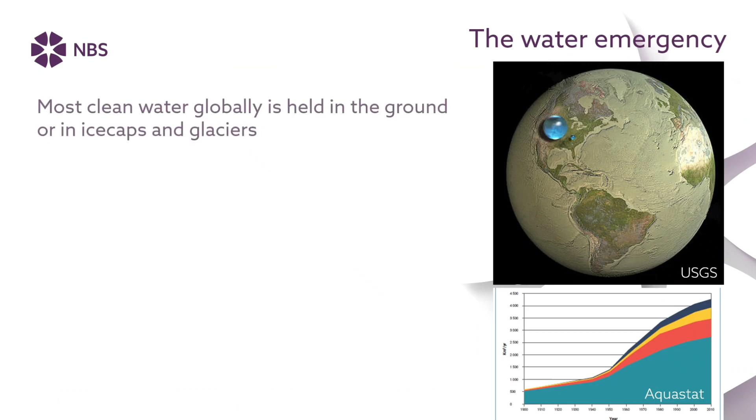You may have seen the world's water diagram by the US Geological Survey, showing the very small amounts of clean water that are shared across the globe. But water obviously doesn't stay in one place, it's constantly moving, and much is in the atmosphere.

But further to those UN statistics, we are in the midst of a water emergency globally. There are multiple risks associated with water insecurity, including economic and financial threats, in terms of successful agriculture, personal health, but also things like tourism and property.

That lack of clean water, not just in terms of the recent pandemic, but in terms of other diseases that have been eradicated in some parts of the world, still impacts low-income nations, often because of a lack of clean water. And remember, supplying clean water and removing waste across nations is a really carbon-intensive and expensive practice.

So many of those aspects are global issues that are likely to be discussed at COP26, but water management is a very national and regional activity. Which is why I'm pleased today to be joined by Claire Galland from Everflow Water, who's going to provide that perspective for us. Thanks, Claire.

Hello, I'm Claire Galland. I'm the Water Efficiency and Environmental Services Manager at Everflow Water. We're the largest independent water retailer in the UK and the fastest growing company in Europe this year, reaching 100 employees in 5 years. We serve 65,000 non-household customers in England and Scotland, and we're growing by more than 1,400 a month. So today I'm going to talk you through a few things.

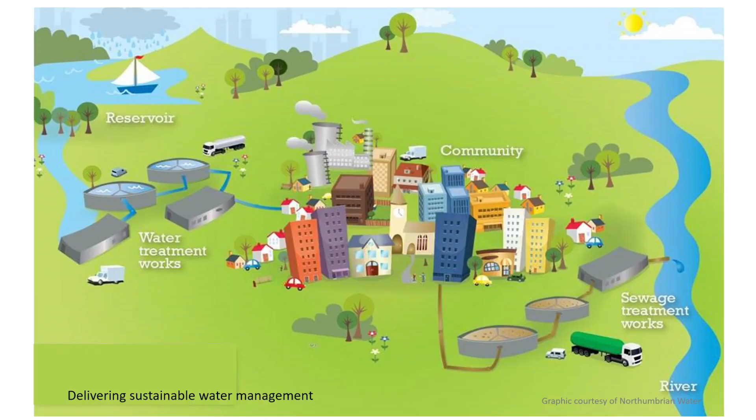The first slide is a graphic kindly supplied to me by Northumbrian Water. There's a limited amount of fresh usable water on Earth. Fortunately, water is naturally recycled through the water cycle. Wholesale water companies tap into this natural water cycle and clean fresh water so it's safe enough to drink. But after the water's been used, they clean it again before returning it to the environment to rejoin the natural water cycle.

Some of the issues affecting this water cycle and the urban water cycle, I'm going to detail now. These are the needs, why we need to take action. The nation's water usage is increasing, rain is less frequent and more intense, and existing infrastructure isn't fit for purpose. Sewer networks usually combine surface and foul water, if not at property level, then somewhere further down the pipe. And while modern developments may separate foul and surface water, water companies don't always adequately upgrade their infrastructure accordingly.

As a nation, we need to allow for economic growth, new housing developments to alleviate the housing crisis, immigration to fill the skills gap in the labour force—very current at the moment—and intensive farming to feed workers and their families. That means there's less and less room and resources for nature that we're taking from. This is having a serious impact on insects, animals and plant life, as well as putting the reliability of our water supplies at risk, particularly in certain parts of the country, but it is a national problem.

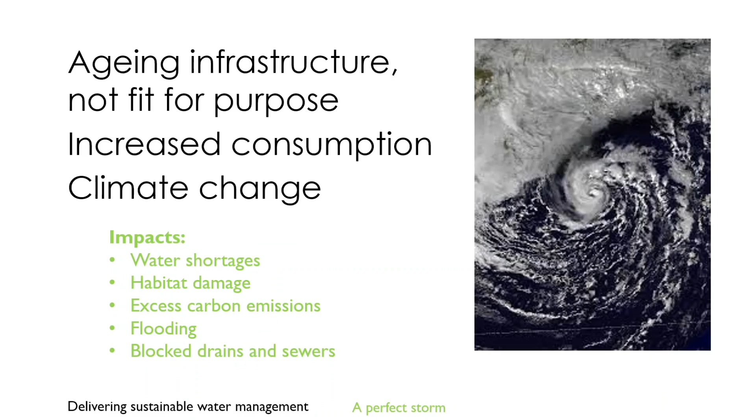So I've given you all the problems, but there are solutions available. We just need to accelerate the uptake. Without action, we'll face a water supply deficit of over 3,400 million litres of water a day in England by 2050, due to population growth, climate change, and the need to protect and restore the environment. That's within a lot of our lifetimes. Failure to act now poses severe risks to our economy, society and the environment.

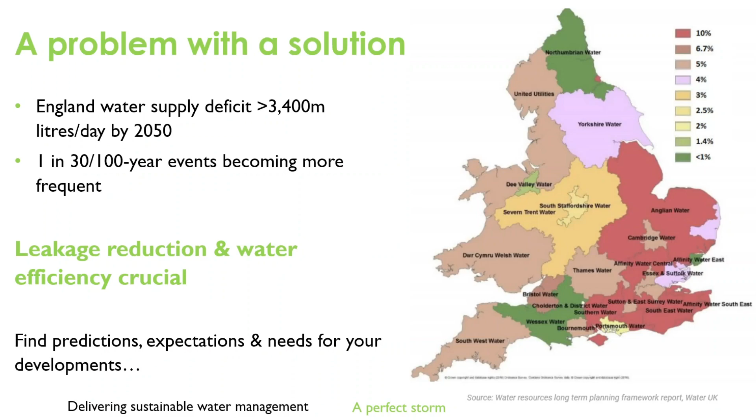Reducing water demand through leakage reduction and water efficiency is crucial, and that's what my role is at Everflow Water. I'm going to point you towards some sources of information where you can find out more about the particular areas you might be building in or specifying for.

All wholesale water companies are required to publish water resource management plans every 5 years. They do this at both a company level and a regional level, collaborating in particular regions of the country. They also produce drought plans, which detail the measures they'll take when things are particularly tight in terms of water supply. So you can check these to understand their climate and water supply predictions, their expectations, and what they need from the developments you're contributing towards.

Wholesalers can use pressure management, for example, to reduce leaks and water consumption during peak periods and droughts. Some may use emergency resources like desalination plants if necessary. But ultimately, your end users who use the buildings you're specifying and designing for can experience temporary use bans or rota cuts. Peak demand during the extreme hot weather in 2018 increased by 10% less for metered customers, so when customers are able to see their usage, it helps with demand management.

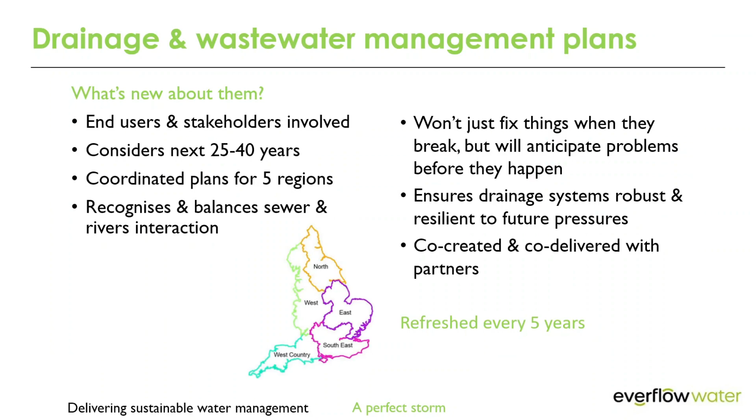Just a few facts and figures to bring some points home. People treat water like an infinite resource, yet only 5% of the water on the planet is safe to drink. It takes energy—6% of energy used in the UK is on water. This energy is used to treat it, transport it, heat it in our homes, as well as build and maintain water and wastewater networks.

Reducing water consumption is an important part of meeting COP26 net zero goals, and a large proportion of the carbon in water use is on water heating. Things you can do include designing and specifying solar water heating panels and storage on buildings, which could make significant savings on energy bills.

On top of this, the amount of water we all use per head has actually doubled to 142 litres per person per day since the 1960s. We need to halve it again before it becomes an emergency. Early indications from the Environment Bill suggest a national government target of around 15% reduction by 2040.

You may have heard the adage, what gets measured gets done. An important principle in behavioural economics is feedback—if people can see the difference their actions are making, they're much more likely to stick to a change in behaviour. Diet programmes make great use of this.

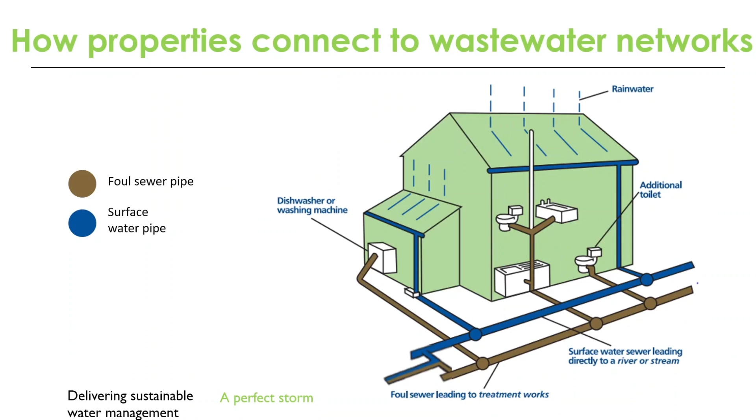A little more about combined sewers, which the majority of housing stock in the UK have—they take both surface water and sewage into the same pipe. In normal weather, this mixture is all treated at sewage treatment works. But in heavy rain, combined sewers can be overwhelmed and flood homes and businesses. Storm overflows release excess water into rivers and the sea, passing it through screens to avoid passing litter into the natural environment.

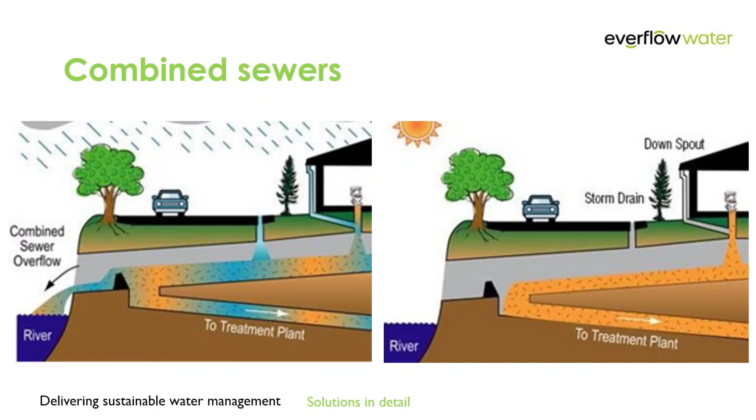Flooding is really destructive. We've had a few events in the UK recently where we've seen what it can do. Luckily, we haven't had anything like Germany, where they've actually had loss of life. It's destructive to both the property and the structure of buildings, and it's happening more frequently.

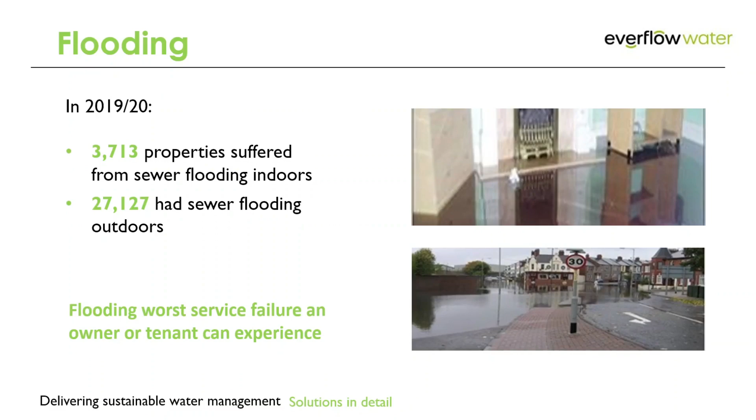Putting the wrong things down drains causes blockages, slow smelly drains and flooding. Fats and oils from kitchens solidify to form huge lumps that block sewer pipes, called fatbergs.

There have been some high-profile prosecutions recently around pollution. Wholesale water companies don't always do the right thing, but blocked sewers, heavy rain and tree roots, or misconnected sewer pipes also play their part in the pollution of our waterways. Not all doom and gloom, though - there are solutions within our grasp.

So I'm just going to talk you through some ways you can future-proof designs and specifications for built environments. I'd like you to think about, while we're going through, how you could help reduce or cope with droughts and flooding and provide value for your clients, which would ultimately aid you with acquisition and retention. Our main driver at Everflow is we want to do the right thing, but we also see it as a commercial advantage for ourselves as well.

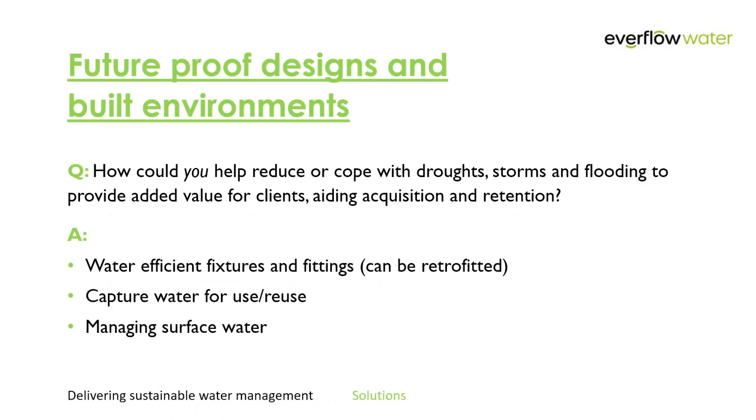So what were once thought to be 1-in-30-year events are actually becoming more frequent. Your customers could see future-proof designs as added value or corporate social responsibility, meeting their priorities for that, and it could make the difference between winning a contract or not. You could even work with developer services providers to make the site completely water neutral. Ofwat's Innovation Fund has just announced that it's supporting Affinity Water to trial water neutral developments in the east of England with Equality. So I'll now go through some of the things designers and specifiers can do in detail.

So leakage is a major source of inefficient use of water, and it's treated water that is basically not being used for what it was being treated for. You could think about where water mains and sewers could go so that they're accessible for maintenance and repairs. You can also minimise their length and joins, corners and other stress points where leaks could occur.

Finding and fixing leaks is a major cost, and reinstatement is always an issue, which prevents many leaks from actually getting fixed. So you could consider designing buildings with leak detector chambers, either on each floor or for each office indoors. You could also design in multiple flow monitors or smart automated read submeters outside to help locate external leaks quickly. This is especially useful on larger sites where undetected leaks can cost tens of thousands of pounds over relatively short periods of time. AMR meters can alert building managers to a burst via mobile networks almost immediately, and also provide accurate meter readings to allow clients to track their usage over time.

In my experience, many leak detectors are cheap to buy, but they do lock the customer into a contract in order to view their data. So you could try to find ones that facilities managers and ordinary users can easily read themselves rather than having to log on to some sort of portal.

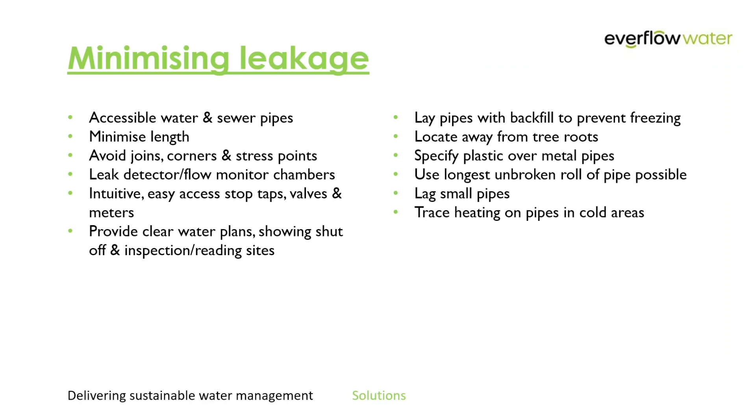As I mentioned before, what gets measured gets done. Customers on water meters use less than those not on meters. This is because they think more about their water use, as they can save money by saving water.

Traditional meter readings are taken manually, mostly a few times a year, but smart meters provide readings hourly or more, so they're much more able to respond and actually do something about leaks and unusual usage levels.

Problem is that wholesalers' costs are mainly committed to maintaining and upgrading existing infrastructure networks, and a large part of customer bills is actually fixed, not related to how much they use. Most meters are over 20 years old as well. Replacing them can cost a lot compared to all the other commitments wholesalers have, so they often aren't prioritised.

On top of that, smart meter rollout is patchy and slow, and only a small proportion of water meters are currently smart. Some wholesalers like Anglian and Thames in London and East of England have really ambitious smart metering programs funded by customers. It's no coincidence that their water resources are based in the eastern area of the UK that's classed as the most water stressed, the desert of England.

So water retailers are lobbying Ofwat at the minute for meter ownership and the responsibility for maintaining, replacing and reading meters to be removed from wholesalers. MOSL, the market operator for non-households, is undertaking a review of meter responsibilities as we speak, and the industry really needs competitive contracts for meter management to provide consistency between different wholesaler regions of England and put metering higher up the list of priorities.

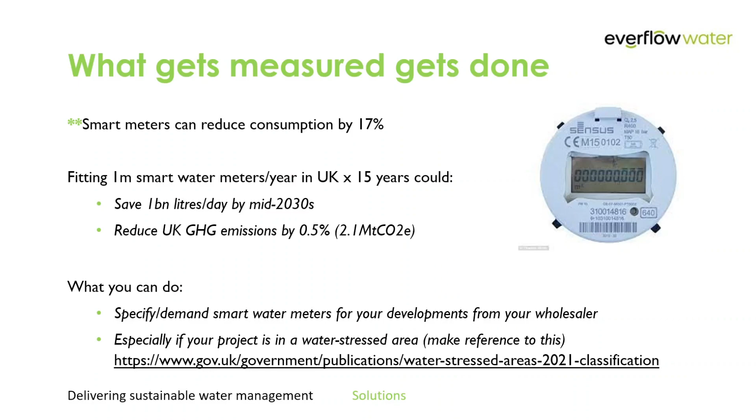You can play your part too by specifying that you want smarter water meters for your sites to your water wholesaler.

Here are some of the water saving fixtures and fittings that you can specify or design into your plans: push or sensor operated taps, tap and shower aerators, flow limiting or pressure reducing valves. They can all be retrofitted on existing building stock, but new developments should really have these as standard by now.

Water efficient taps with aerators can consume 75% less water, and dual flush and other innovative toilets can use 75% less water than the old 10-litre single flush systems. If customers use less hot water, they're also saving on their energy bills and carbon emissions.

When specifying toilets, for example, try to choose dual flush mechanisms, but not just the standard ones—ones that make it obvious which button is for big and small flushes and aren't easy to flush the wrong one or both by mistake. In my role so far, I've not found a very wide choice of suppliers of eco or water efficient products in the market, so there could be some opportunities to market new water efficient products for some of you.

We're actually a tech company and believe in keeping things simple, so we're innovating in how customers can identify opportunities for them to save water without needing to send out costly consultants to site. This could potentially be applied to building designs before they're even built. So if you're interested in discussing this, do get in touch with makemegreener@everflowwater.com.

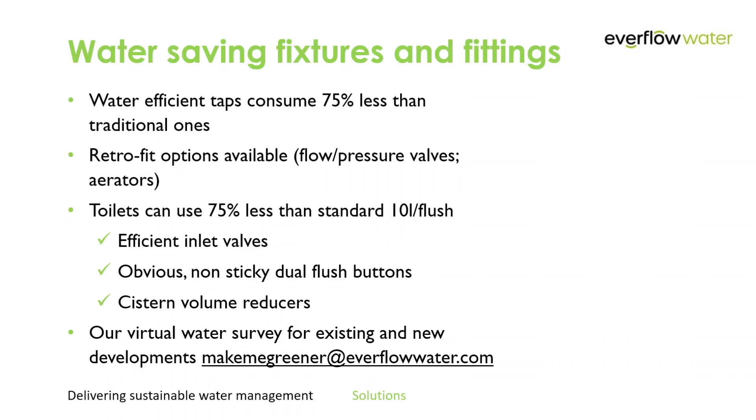A little bit about national standards and some funding opportunities now. There are going to be opportunities to develop and market new water saving products. DEFRA, for example, is introducing mandatory water efficiency labels for domestic and business water using products.

In 2022, the government's publishing a roadmap for how it and others will ensure new developments and existing buildings are water efficient. This includes accommodating adoption of water-saving technologies like rainwater harvesting and water reuse. In England, over 27 litres can be knocked off our average daily water use per person by combining a label with product and building standards.

I wanted to talk a little bit about how people can capture their own water. We often hear from end users that water falls from the sky, why do I have to pay for it? Well, if they want to capture their own, this is how.

Where there's adequate roof space and outdoor space for storing water tanks, something to note is that underground water tanks are a lot less unsightly, but they are much more costly. So great if you can design them in at an early stage, not so great to retrofit.

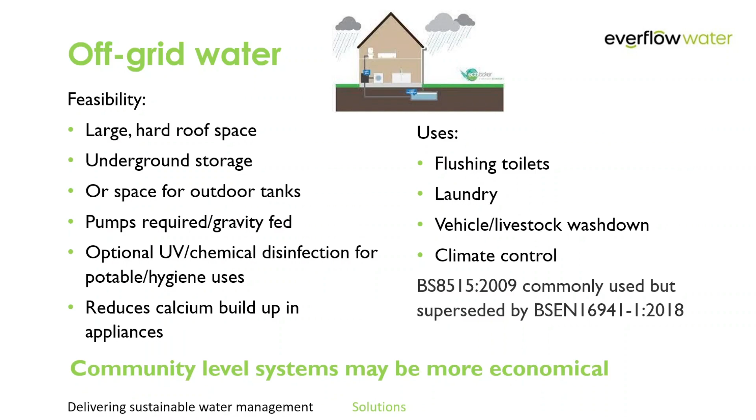Another source of water saving would be recycling. We call it grey water. Grey water is lightly used water from baths, showers, washing machines, dishwashers and sinks. It makes up between 50 and 80% of a household's wastewater and probably more in a commercial setting. This water is typically used for flushing toilets or irrigating plants.

There are specialists who provide grey water recycling systems for large buildings, but there are also simple systems in development at the minute at a small business and household level, which directly link individual appliances to recycle grey water. For example, by filling toilet cisterns directly from shower trays.

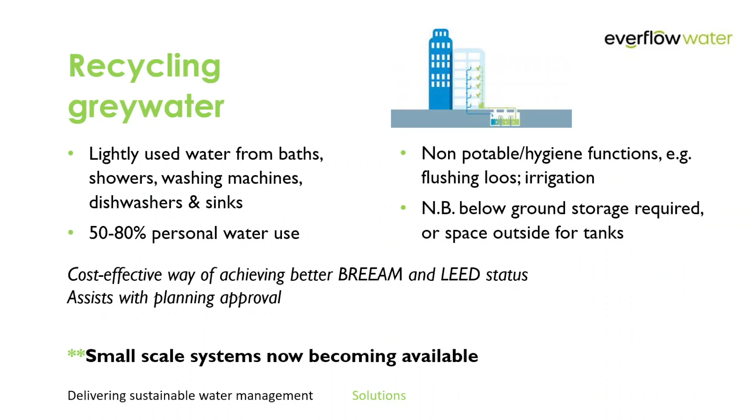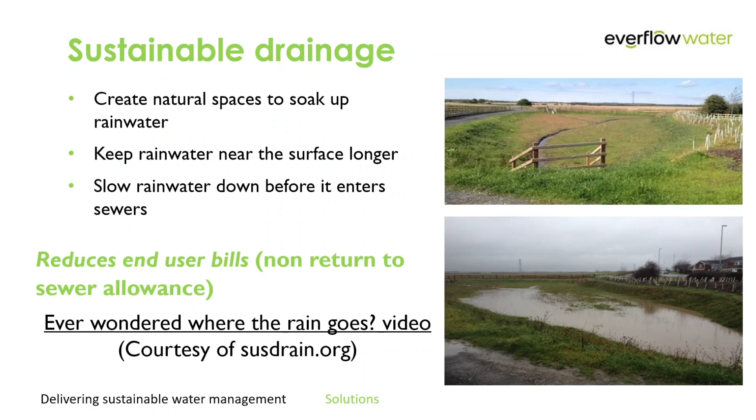Thinking about all of our individual behaviour is useful as well. Reducing the chance of blocked sewers by only putting toilet paper, pee and poo down the loo is something everyone can help to do. Lots of wipes, while they're actually marketed as flushable, i.e. they'll disappear from the pan, get stuck elsewhere and don't break down quickly enough, which causes blockages.

While you can't control what end users do, designers and specifiers can use more permeable surfaces, for example, capture rainwater for use elsewhere and ensure that pipework's optimised.

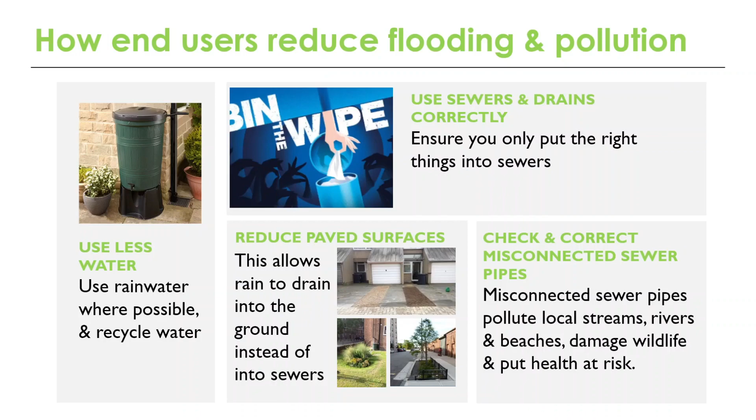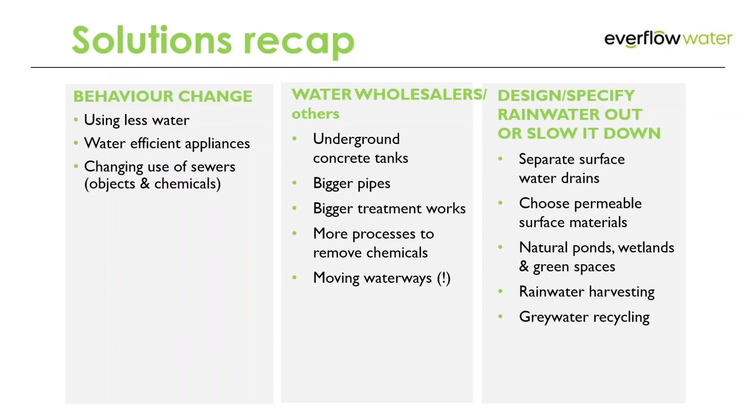So here's a summary of the different solutions, ranging from end users to wholesalers, water wholesalers to yourselves. As you can see, we can all play a part. To finish, I'd just like to give some examples of what we're doing at Everflow towards the Sustainable Development Goals.

Countries are being asked to come up with ambitious 2030 emissions reduction targets that align with limiting the global average temperature increase to 1.5 degrees. That's what would avoid catastrophic climate change. We're definitely already going to get some. The reductions targets are also aimed at securing global net zero emissions by 2050.

So to deliver on these stretching targets, countries will need to do the following. They need to accelerate the phase out of coal and encourage investment in renewables. So as a business, we're encouraging and helping our business customers to fix leaks and use water efficiently. That will ultimately limit and reduce their carbon emissions. We're also reducing our own by switching to energy suppliers like Ecotricity, who source their energy entirely from renewables and support green lobbying.

Curtailing deforestation is another one of the ways that's specified in the Sustainable Development Goals. So as a business, we follow zero waste and circular principles such as paperless offices, using recycled products where possible, and recycling waste. We're also planning how we can make our customer water supplies carbon neutral by doing things like planting trees. Another one of the Sustainable Development Goals is speeding up the switch to electric vehicles.

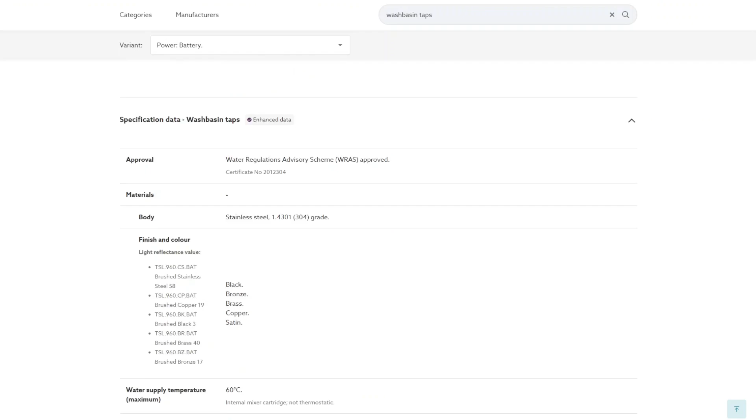And within the flow rate, you can then see that it can be limited to reduce the amount of water coming through the tap head. Also, because this particular item can be battery powered, that can be really useful for retrofit projects where it may not be possible to hook up into the mains, so for those projects you can still use quite efficient systems.

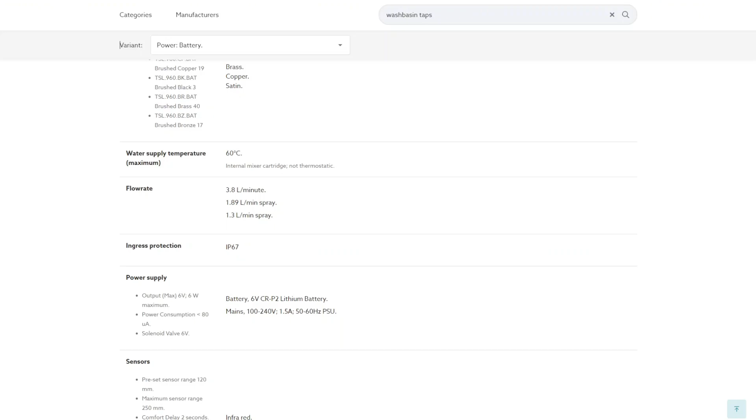The second example I wanted to show you was Kelda Showers, who are using their air-powered fan technology to atomize water into large droplets, thereby lowering water use to as low as 5 litres per minute, without reducing the power or feel of the shower itself.

To demonstrate that, we've got on NBS Source case studies from a number of manufacturers that you can use to see how these products have been applied in real project situations. In this case, the London Aquatic Centre, where working with the project team, Kelda demonstrated water and energy savings of 40%, whilst actually improving the shower performance.

And we'll continue to work with manufacturers to help them add more of those properties that are going to help you specify water efficient products.